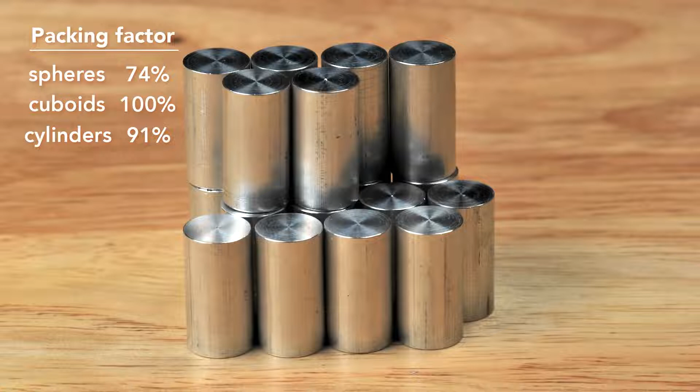But the cuboid surpasses the sphere in packing efficiency. It has almost no wasted space, although at the sacrifice of using more surface area to contain the same volume as the sphere. So to create a can, engineers use a cylinder, which has elements of both shapes. From the top, it's like a sphere, and from the side, it's like a cuboid. A cylinder has a maximum packing factor of about 91%, not as good as the cuboid, but better than the sphere. Most important of all, the cylinder can be rapidly manufactured.

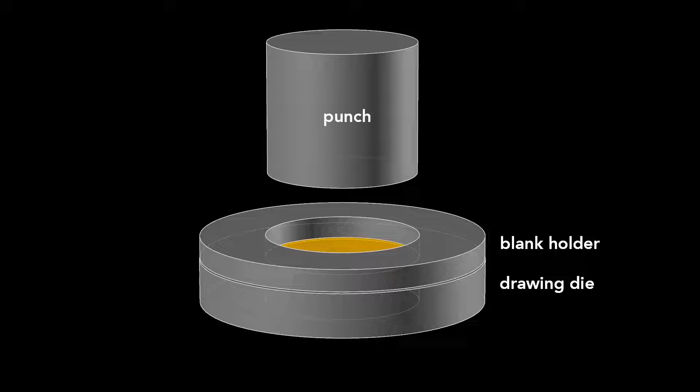The can begins as this disc called a blank, punched from an aluminum sheet about 3/10 of a millimeter thick. The first step starts with a drawing die, on which sits the blank and then a blank holder that rests on top. We'll look at a slice of the die so we can see what's happening. A cylindrical punch presses down on the die, forming the blank into a cup. This process is called drawing.

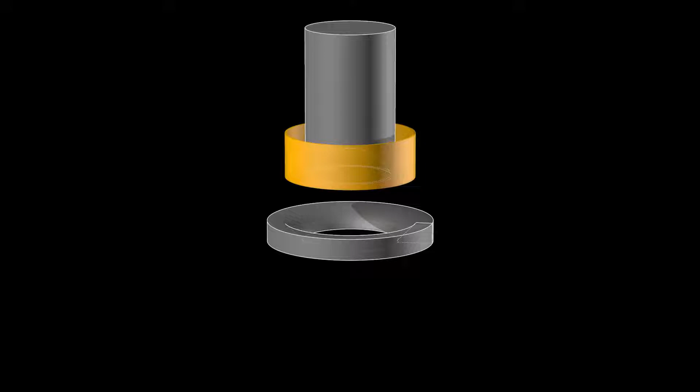This cup is about 88 millimeters in diameter, larger than the final can, so it's redrawn. That process starts with this wide cup and uses another cylindrical punch and a redrawing die. The punch presses the cup through the redrawing die and transforms it into a cup with a narrower diameter, which is a bit taller.

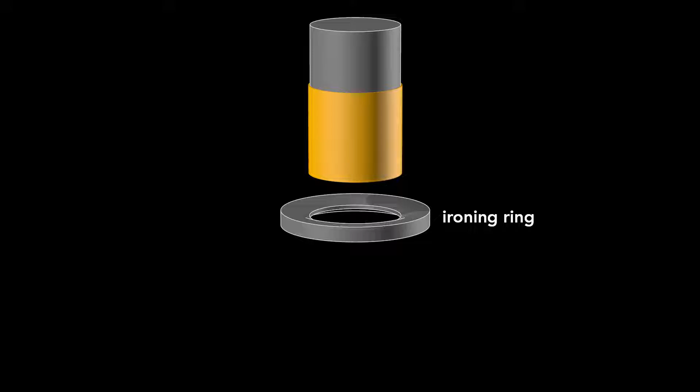This redrawn cup is now the final diameter of the can, 65 millimeters, but it's not yet tall enough. A punch pushes this redrawn cup through an ironing ring. The cup stays the same diameter as it becomes taller and the walls thinner. If we watch this process again up close, you see the initial thick wall and then the thinner wall after it's ironed. Ironing occurs in 3 stages, each progressively making the walls thinner and the can taller.

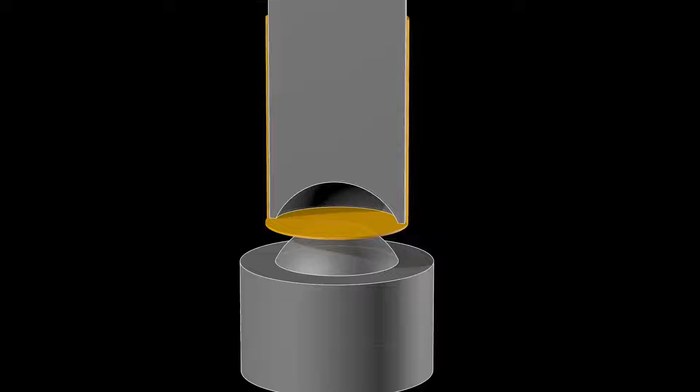After the cup is ironed, the dome on the bottom is formed. This requires a convex doming tool and a punch with a matching concave indentation. As the punch presses the cup downward into the doming tool, the cup bottom then deforms into a dome. That dome reduces the amount of metal needed to manufacture the can. The dome bottom uses less material than if the bottom were flat.

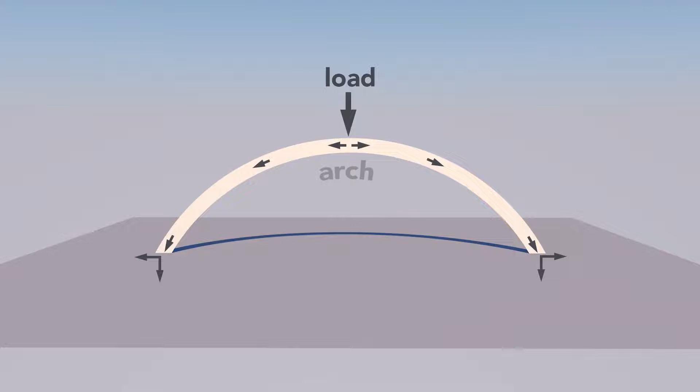A dome is an arch revolved around its center. The curvature of the arch distributes some of the vertical load into horizontal forces, allowing a dome to withstand greater pressure than a flat beam.

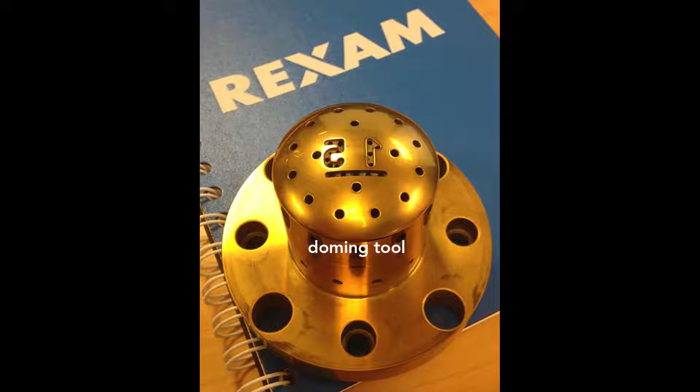On the dome, you might notice 2 large numbers. These debossed numbers are engraved on the doming tool. The first number signifies the production line in the factory, and the second number signifies the body maker number. The body maker is the machine that performs the redrawing, ironing, and doming processes. These numbers help troubleshoot production problems in the factory. In that factory, the manufacturing of a can takes place at a tremendous rate.

These last 3 steps, redrawing, ironing, and doming, all happen in one continuous stroke and in only 1/7 of a second. The punch moves at a maximum velocity of 11 meters per second and experiences a maximum acceleration of 45 Gs. This process runs continuously for 6 months, or around 100 million cycles before the machine needs servicing.

But before that sealing occurs, a colorful design is printed on the outside. The term of art in the industry is decoration. The inside also gets a treatment. A spray-coated epoxy lacquer separates the can's contents from its aluminum walls. This prevents the drink from acquiring a metallic taste and also keeps acids in the beverage from dissolving the aluminum.

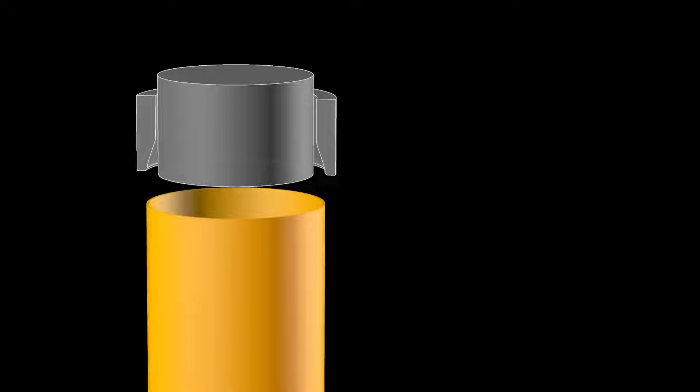Each one of these stages works by inserting an inner die into the can body, then pushing an outer die, called the necking sleeve, around the outside. The necking sleeve retracts, the inner die retracts, and the can moves to the next stage. The necking is drawn out over many different stages to prevent wrinkling or pleating of the thin aluminum.

Since the 1960s, the diameter of the can end has become smaller by 6 millimeters, from 60 millimeters to 54 millimeters today. This seems a tiny amount, but the aluminum can industry produces over 100 billion cans a year, so that 6 millimeter reduction saves at least 90 million kilograms of aluminum annually. That amount would form a solid cube of aluminum 32 meters on a side.

Compare that to a 787 Dreamliner with a 60-meter wingspan. Now, after the neck has been formed, the top is flanged. That is, it flares out slightly and allows the end to be secured to the body, which brings us to the next brilliant design feature, the double seam.

On older steel cans, manufacturers welded or soldered on the ends. This often contaminated the can's contents. In contrast, today's cans use a hygienic double seam, which can also be made faster. This can is cut in half so you can see the cross-section of the double seam.

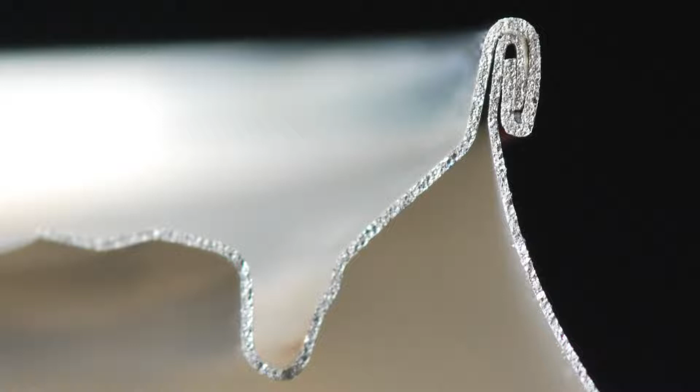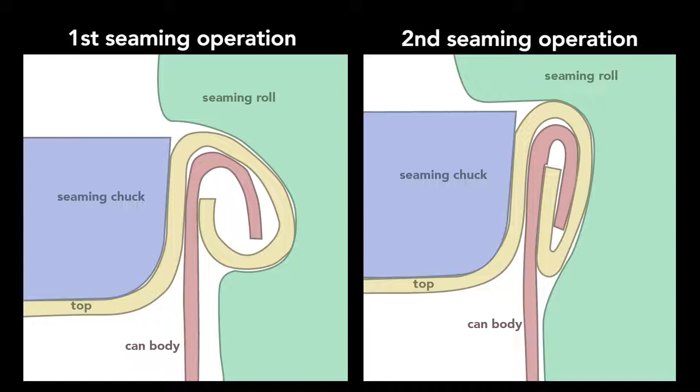To create this seam, a machine uses two basic operations. The first curls the end of the can cover around the flange of the can body. The second operation presses the folds of the metal together to form an airtight seal. While the operations themselves are simple, they require high precision. Parts misaligned by a small fraction of a millimeter cause the seam to fail.

In addition to the clamping of the end and can body, a sealing compound ensures that no gas escapes through the double seam. The compound is applied as a liquid, then hardens to form a gasket. The end, attached immediately after the can is filled, traps gases inside the can to create pressures of about 30 psi, or 2 times atmospheric pressure.

In soda, carbon dioxide produces the pressure. In non-carbonated drinks like juices, nitrogen is added. So why is a beverage can pressurized? Because the internal pressure creates a strong can despite its thin walls.

Squeeze a closed, pressurized can, it barely gives. Then, squeeze an empty can. It flexes easily, the can walls are thin, only 75 microns thick, and they're flimsy. But the internal pressure of a sealed can pushes outwards equally and so keeps the wall in tension.

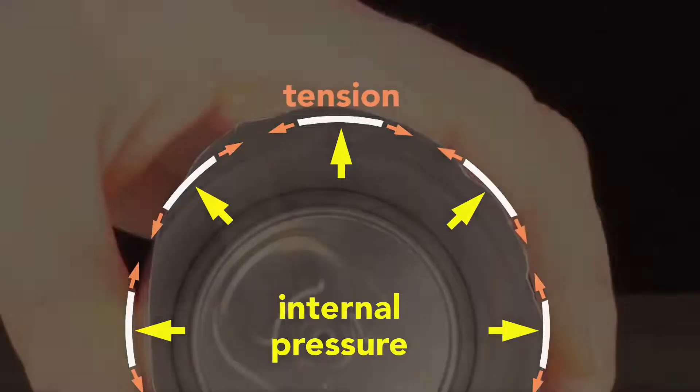This tension is key. The thin wall acts like a chain: in compression it has no strength, but in tension it's very strong. The internal pressure strengthens the cans so they can be safely stacked. A pressurized can easily supports the weight of an average human adult, and it adds enough strength so the can doesn't need corrugations like this unpressurized steel food can.

While initially pressurized to about 2 atmospheres, a can may experience up to 4 atmospheres of internal pressure in its lifetime due to elevated temperatures, so the can is designed to withstand up to 6 atmospheres, or 90 psi, before the dome or the end will buckle.

Why is there a tab on the end of the can? It seems a silly question—how else would you open it? But originally, cans didn't have tabs. Very early steel cans were called flat tops for pretty obvious reasons. You'd use a special opener to puncture a hole to drink from and a hole to vent.

In the 1960s, the pull tab was invented so no opener was needed. The tab worked like this: you lift up this ring to vent the can and pull the tab to create the opening. Easy enough, but now you've got this loose tab. The cans ask you to please don't litter, but sadly these pull tabs got tossed on the ground, where the sharp edges cut the bare feet of beachgoers or harmed wildlife.

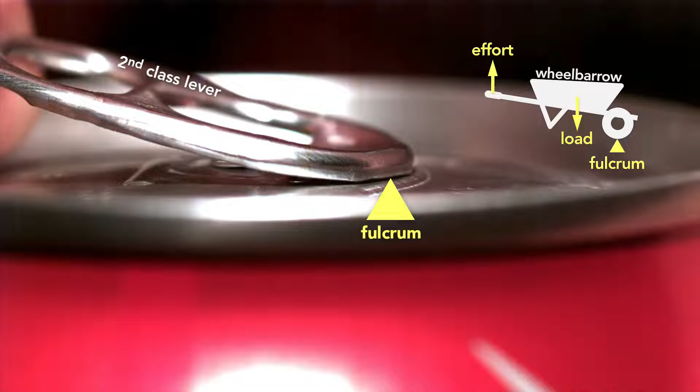So the beverage can industry responded by inventing the modern stay-on tab. This little tab involved clever engineering. The tab starts as a second-class lever—like a wheelbarrow—because the tip of the tab is the fulcrum and the rivet is the load. The effort is being applied on the end.

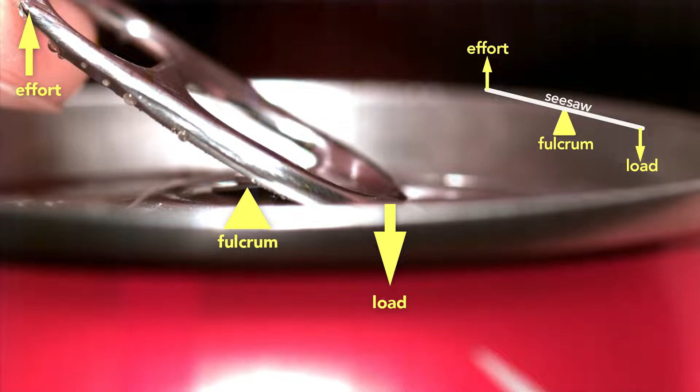But here's the genius part: the moment the can vents, the tab switches to a first-class lever, which is like a seesaw, where the load is now at the tip and the fulcrum is the rivet. You can see clearly how the tab, when working as a wheelbarrow, lifts the rivet. Part of the reason this clever design works is because the pressure inside the can helps force the rivet up, which in turn depresses the outer edge of the top until it vents the can, and then the tab changes to a seesaw lever.

Looking from the inside of the can, you can see how the tab first opens near the rivet. If you tried to simply force the scored metal section into the can using the tab as a first-class lever with the rivet as the fulcrum throughout, you'd be fighting the pressure inside the can. The tab would be enormous and expensive.

The aluminum beverage can is so ubiquitous that it's easy to take for granted. But the next time you take a sip from one, consider the decades of ingenious design required to create this modern engineering marvel. I'm Bill Hammack, the Engineer Guy.